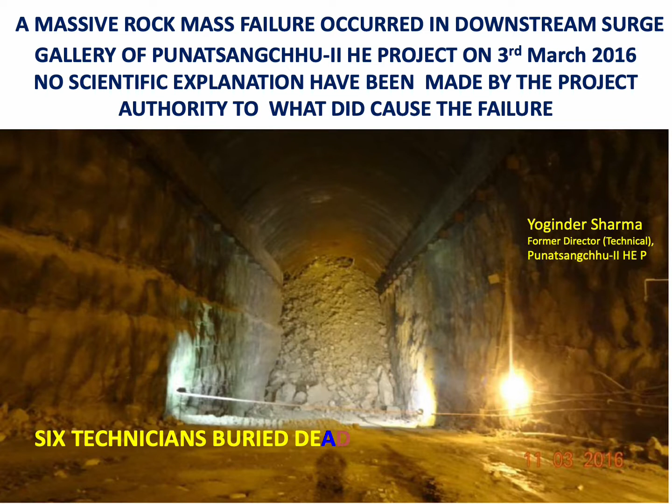A massive rock mass failure occurred in the downstream surge gallery of Punatsangchhu-II hydroelectric project on 3rd March 2016. There was no attempt made to bring out a scientific explanation by either the designers or the project authority or the consultants as to what did cause the failure.

6 technicians were buried dead under the falling muck. 3 of the bodies still lay buried, unrecovered.

I tried to study various aspects associated with the failure, and therefore the following is the presentation of my pursuit of truth, which many authorities have shied away from acknowledging and coming forth with the explanation.

I'll be talking about rock mechanics behind the raveling formation of the cavity, which was as big as a field of football, and as big in height as 1/3 of the height of the Eiffel Tower.

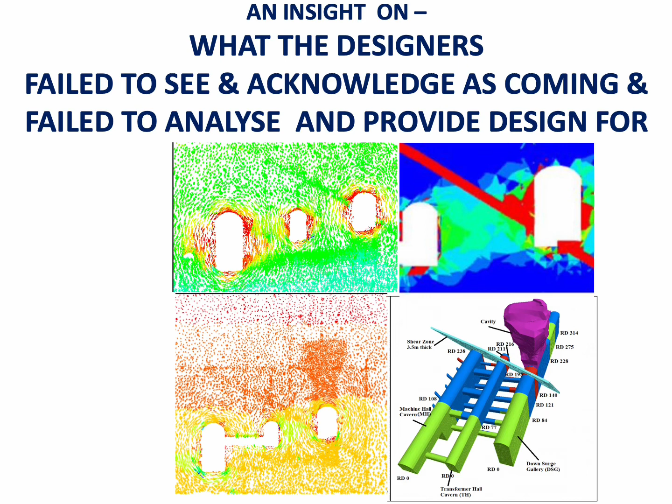To give an insight into what the designers failed to see and acknowledge as coming, and therefore failed to analyze and provide design for, which ultimately resulted in the raveling cavity formation of that big a size through the crown of the downstream surge gallery of Punatsangchhu-II project.

There are many geological features that were not investigated by the consultants, and no proper analysis therefore could have been, or was done, to foresee any situation which could have resulted in such a big failure.

I'll be talking in detail about all the aspects which led to the failure, and understand the rock mechanics behind that phenomenon.

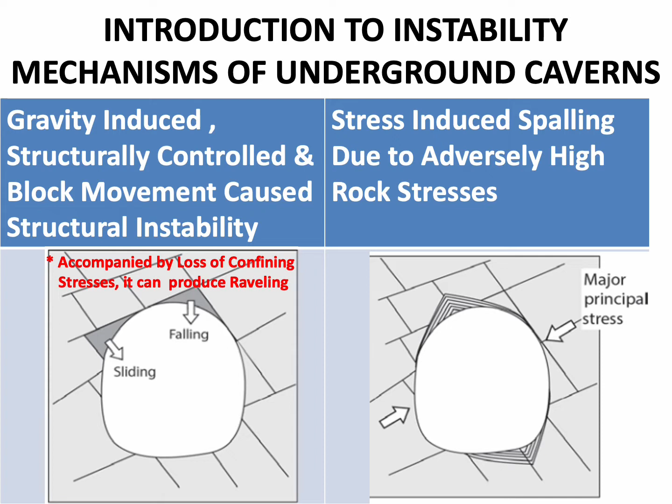Let's understand the mechanism of massive rock mass failure in the downstream surge gallery of Punatsangchhu-II hydroelectric project.

Punatsangchhu-II hydroelectric project is designed to produce 1020 megawatts, and is situated at the tail end of the Punatsangchhu-I hydroelectric project, which is also under construction. Punatsangchhu-II project starts where the TRT outfall of Punatsangchhu-I is located.

A dam is under construction on the Punatsangchhu river, which flows this way. There are 4 intake tunnels that lead to 4 desilting chambers, and to one headrace tunnel, which is around 13 kilometers long, which finally...

...was designed to fall into the river back when the surface powerhouse was designed as a powerhouse. For some environmental reasons, consultants shifted this location of the surface powerhouse to around 3 kilometers inside the hill.

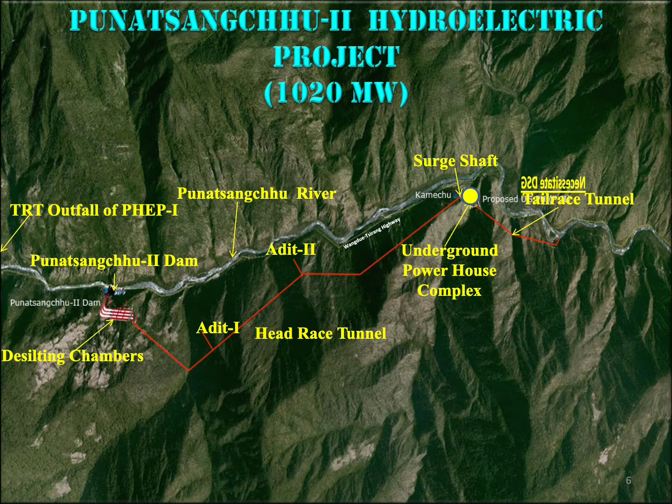With this change, there was a necessity of introducing a downstream surge gallery, because there was a 3.1 kilometer long tailrace tunnel introduced. The consultants for the project are WAPCOS, the design consultants are Central Water Commission, and the geology consultants are Geological Survey of India.

The massive rock mass failure happened 3 years after the excavation of the crown. In this slide we'll try to take note of 3 important points. First is that the massive rock mass failure had happened only after 3 years after the excavation of the crown.

The crown was standing for 3 years intact. Excavation had started somewhere around March 2013, until March 2016, the crown was fairly stable and was standing intact, when the rock mass failure happened 3 years after, in March 2016.

Second point to take note of is that the rockfall took place in a very short interval of time, leading to formation of a huge cavity above the crown.

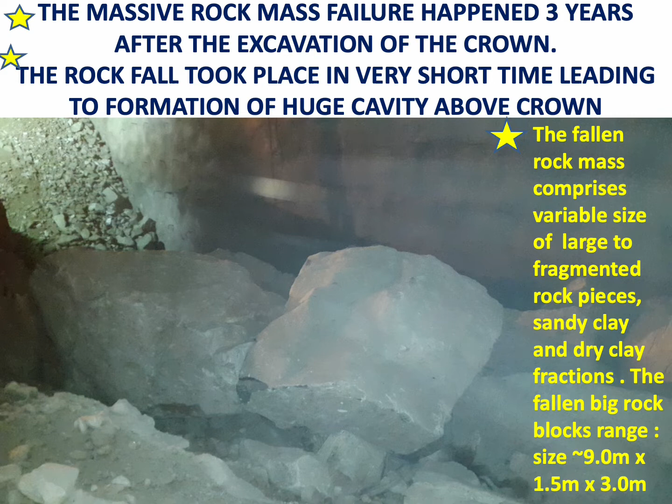Having started in March 2013, excavation in the 3 caverns - the machine hall, the transformer hall, and the downstream surge gallery - stood as on 2nd March 2016 at the stage shown in green. The machine hall, with its height of around 52 meters, was almost fully excavated. The bus ducts were fully excavated. The transformer hall was fully excavated. And the downstream surge gallery, out of its total height of 58.5 meters, had proceeded to a depth of 30 to 40 meters.

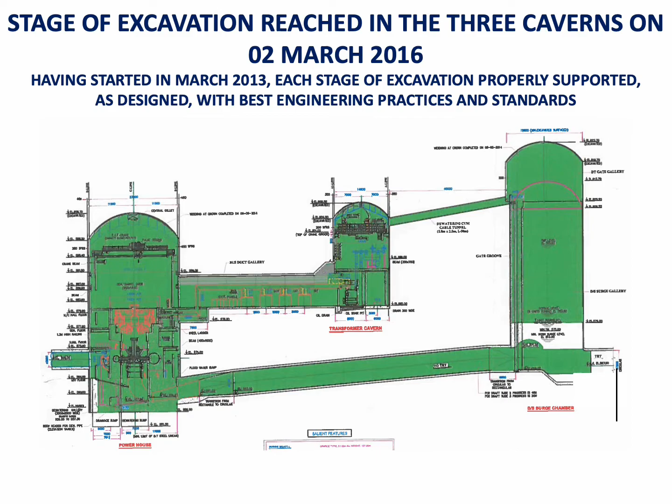The powerhouse downstream wall had 6 openings: 6 openings of the draft tube tunnels, 5 openings of huge bus ducts connecting tunnel, and an emergency exit. There were 4 pressure shafts - actually 6 pressure shafts - entering into the upstream wall of the powerhouse cavern.

So with these openings in the 2 walls, the walls of the machine hall were more vulnerable to instability. Moreover, the machine hall was excavated to its full height of 52 meters, whereas the downstream surge gallery was excavated only to a height of 30 to 40 meters. So considering which looked more vulnerable, the machine hall was not facing any instability of the order which the downstream surge gallery eventually had to meet with.

This is intriguing. It is also intriguing why the rock mass in the crown failed while excavation was underway in benching, 40 meters below the crown. Why did the rock mass fail suddenly and extend to make a 91 meter high cavity with a very large base, almost in no time?

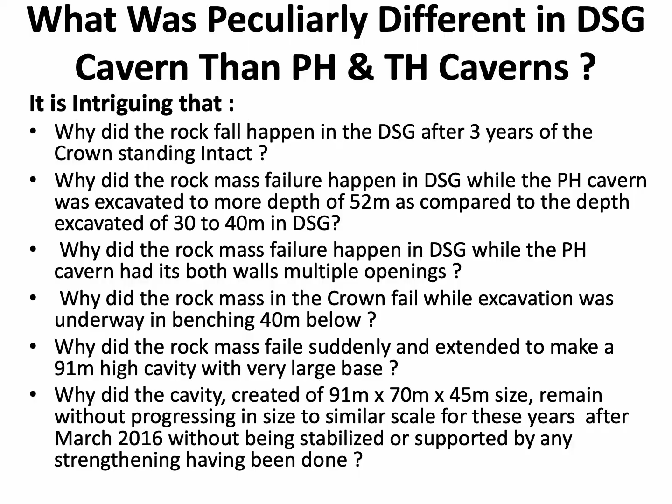We'll try to find answers to all these points in the coming slides. First, let us find whether the massive rock mass failure in the downstream surge gallery cavern was inevitable.

Actually, the designers were warned beforehand in 2014. The design consultants were furnished a numerical analysis performed by the contracting agency for construction of the powerhouse. That analysis established that upon adopting the given designs, massive yielding of rock mass would occur in the intermediate rock pillar when the downstream surge gallery was excavated to 2/3 height, around 38 meters, and this yielding would increase further with progress of excavation to its full height of 58 meters. But unfortunately, the design consultants did not pay heed to this analysis and snubbed it. Isn't it ironical that the excavated height of the downstream surge gallery was indeed at its middle third, around 30 to 40 meters, on 3rd March 2016 when the massive rock fall happened in the downstream surge cavern?

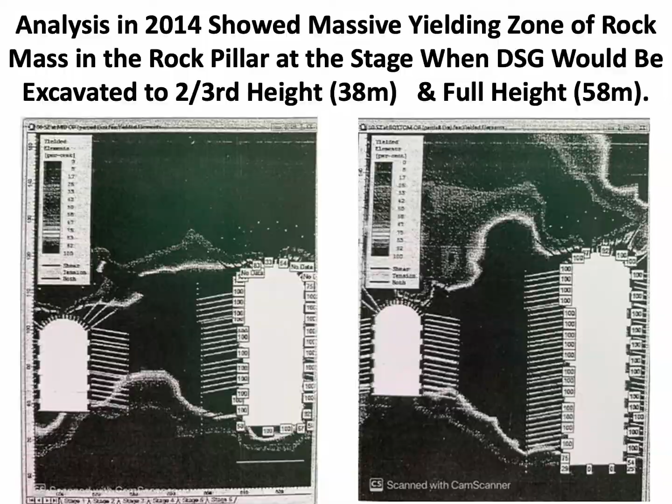Eventually, a cavity of 91 meter height, 70 meter length and 45 meter base formed, raveling through the downstream surge gallery's crown on 3rd March 2016. Let us understand what progressive raveling is, and when and why it happens.

There is an International Journal of Rock Mechanics and Mining Sciences which has a very beautiful paper, beautifully covering the topic of progressive raveling. The title of the topic is Stress, Instability and Design of Underground Excavations, by the authors C.D. Martina, P.K. Kaiserb, and R. Christiansson.

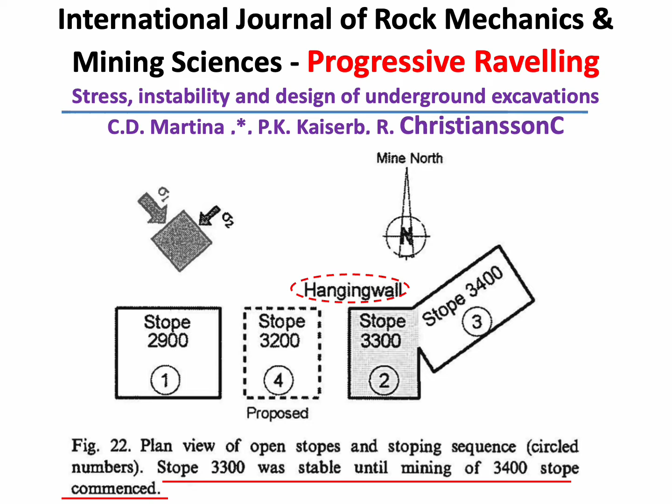So this is stope 3300 with this wall having a feature of hanging wall, and accordingly this wall is foot wall. The massive sulfide ore zone is at a depth of 300 meter along strike and 45 meter in width from foot wall to hanging wall, and dipped between 65 to 85 degrees. The dipping of this wall is around 65 to 85, quite a steep hanging wall.

This is stope 1, that in the sequence this stope was excavated first. So stope 3300 was excavated next, and when the stope 3400 had just started with its excavation, there was a raveling failure in the stope 3300 through its hanging wall.

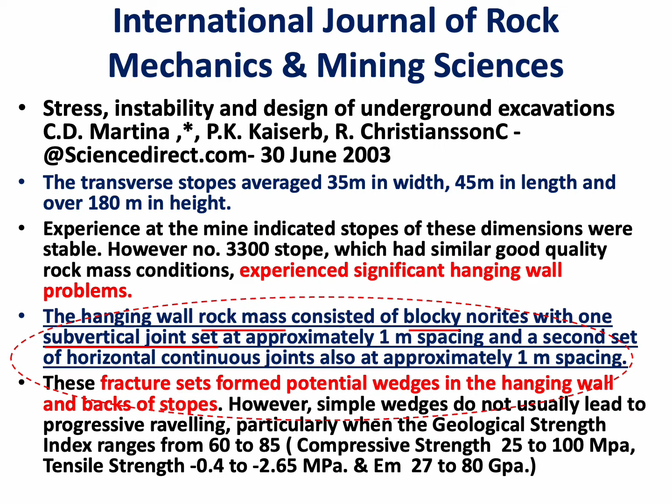These stresses becoming tensile become the cause of loss of confinement in this region. The blocky rock had lost its confinement in this region because of the prevailing tensile stresses in and around them.

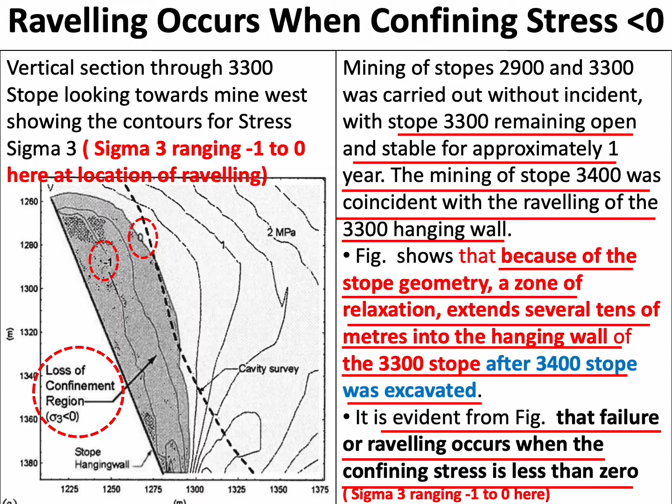It is pointed out in the paper that loss of ductile behavior happens due to lack of confinement pressure. More evidence is presented that the higher the confining pressure, the greater the ductility observed, and vice versa. So if the confining pressures are lesser or even tensile, then the ductility would be lost and the rock mass would depict brittle behavior.

The experiments on the effect of strain rate also show that when the strain rate is increased, it makes rock appear more brittle.

So these are the underlined principles for raveling: first, the ductility would be lost if the confining pressures do not remain higher.

If they become tensile, it will become brittle. And as and when the strain rate would increase, the rock would appear to be more brittle.

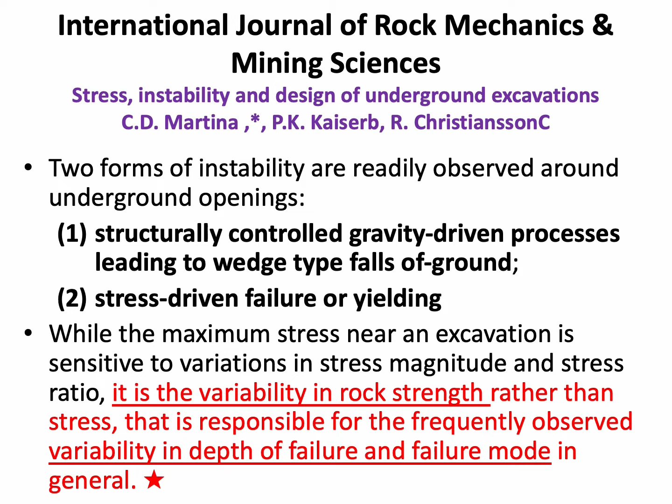If the rock mass is not uniformly or homogeneously representing its strength across various dimensions of it, that variability in rock strength rather than the stress is responsible for frequently observed variability in depth of failure and failure mode in general.

So now with this background, let us find answers to why did progressive raveling occur suddenly through the downstream surge gallery crown of Punatsangchhu-II hydroelectric project, and that too after 3 years of stable excavation of the crown. So from that paper that we have discussed before, we understand that there are 5 prerequisites for a progressive raveling to occur.

A progressive raveling occurs, extending the resulting cavity from the rock fall into several tens of meters into the rock mass, when the rock mass is blocky, comprising numerous joint sets. Like in the case of mining of stope number 3300, the rock mass is blocky, comprising numerous joint sets. These fracture sets form potential wedges. This is the second prerequisite, that the fracture sets should form potential wedges.

There exists a significant problematic hanging wall problem. So the third prerequisite is that if there's any hanging wall phenomenon happening, that hanging wall should have some problematic features. Then along with these, the fourth prerequisite is that the confining stress in the hanging wall is less than 0.

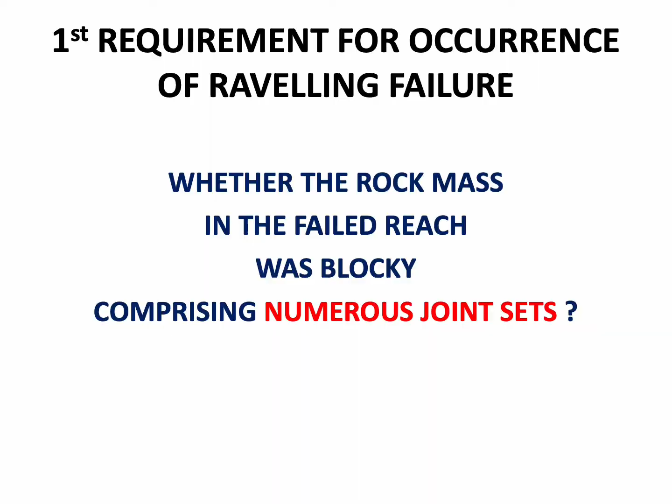The rock mass classification evaluated in excavation of central gullet in downstream surge gallery was that for RD 0 to 84 it was class 3, 84 to 121 class 4, and these are the average values of geological strength index associated with these reaches, which have been evaluated by National Institute of Rock Mechanics.

And from RD 121 to 140, it comprised class 5 rock mass with geological strength index of 32, and 140 to 228 RD, the rock mass is of class 4 with an index of 47 to 48. This is the reach in which eventually the failure had happened, comprising class 5 and class 4 with geological strength index of 32 to 47.

Besides a 3.5 meter thick major shear zone at RD 124 meter with an inclination of 45 to 60 degrees and orientation of north 30 degree east, there were also a number of other 0.02 to 0.3 meter thick shear seams that existed between RD 148 to 166 meter, with inclination of 10 degrees and orientation of south 60 degree west, and a geological strength index of merely 15, present in these reaches. So the actual geology was poor to very poor.

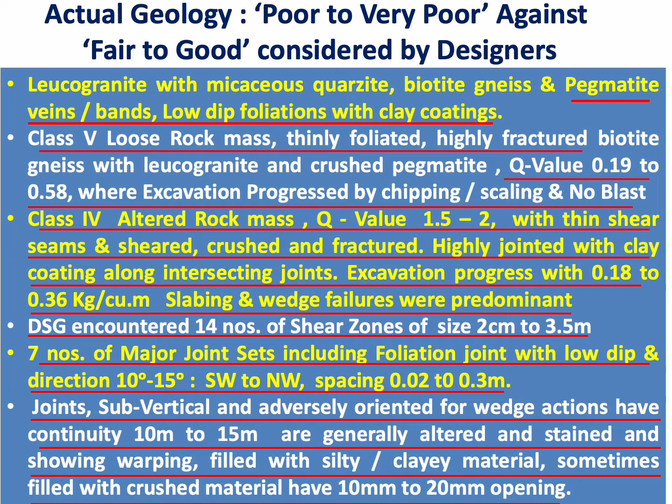Now there are 3 kinds of information available for joint sets present in the downstream surge cavern. The first set of information is as considered by the design consultants and thereafter by the National Institute of Rock Mechanics in their analysis. It represents 4 joint sets.

Whereas the fifth joint set, which is present as shown in the other two caverns, the machine hall or powerhouse cavern and transformer hall, is conspicuously missing in its representation in the downstream surge gallery. So these are the four joint sets that have been considered by the designers and also in the analysis by NIRM.

In contrast to this, in actual excavation, as mapped by the resident geologist of the construction agency, the information on joints encountered during excavation is J1, J3, J5, J4, J7, J8, J2, J6.

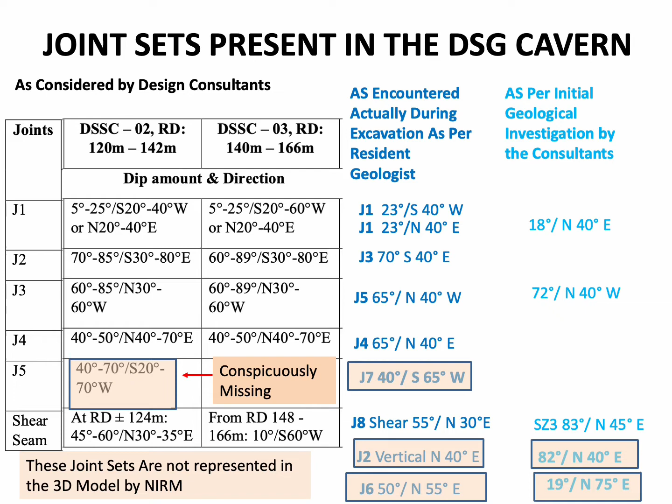The shear zone and the thinly foliated, highly fractured biotite gneiss and crushed leucogranite pegmatite got exposed on the left wall near SPL at RD 124 meter to RD 140 meter. Further, the crown blocky and jointed rock mass is exposed.

A major shear zone was encountered with 45 to 60 degree dip, N30 orientation, encountered in April 2013 at the crown portion between RD 124 to RD 140 meter, extending above the crown and below on either wall, dipping towards face, that is gable end wall. The excavation was progressing from south to north, and this shear zone was also dipping towards the face of the excavation.

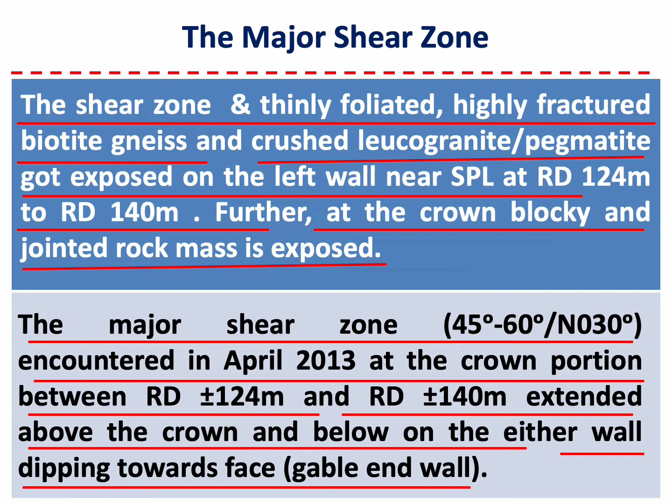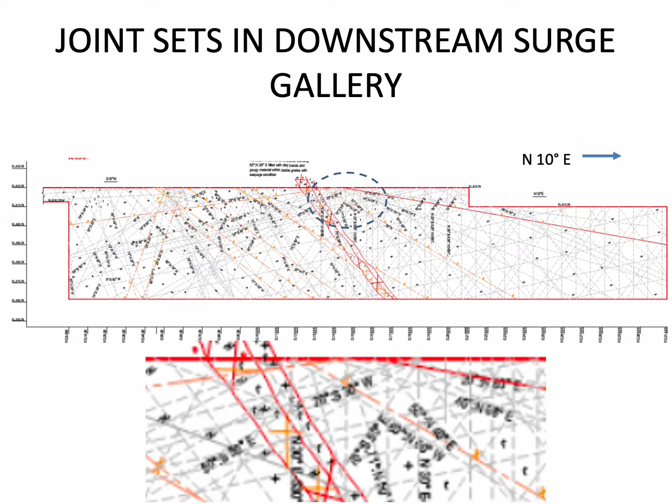This is another representation of the joint sets in the downstream surge gallery in 3D. This is the shear zone, with so many of the shear seams and subvertical and horizontal, subhorizontal joint sets.

So it is confirmed that the first prerequisite is met. Indeed, the rock mass in reach between RD 140 to 228 meter, which was lying on the steeply inclined shear zone, comprised class 4 altered rock mass with Q value of 1.5 to 2, which is highly jointed with clay coating and crushed and fractured rock infilled along intersecting joints, and had presence of numerous thin shear seams. So this confirms that the first prerequisite, which makes the rock mass highly jointed, was present there.

The second prerequirement for occurrence of raveling is whether the rock mass comprised numerous potential wedges. There is international literature which cautions that large numbers of adversely oriented joint sets would result in overbreaks and loose rock falls.

There is a paper, '40 Years with the Q System in Norway and Abroad,' by Nick Barton and Eystein Grimstad. It gives an interpretation from the parameters like joint set number and joint roughness number of NGI's rock mass quality index.

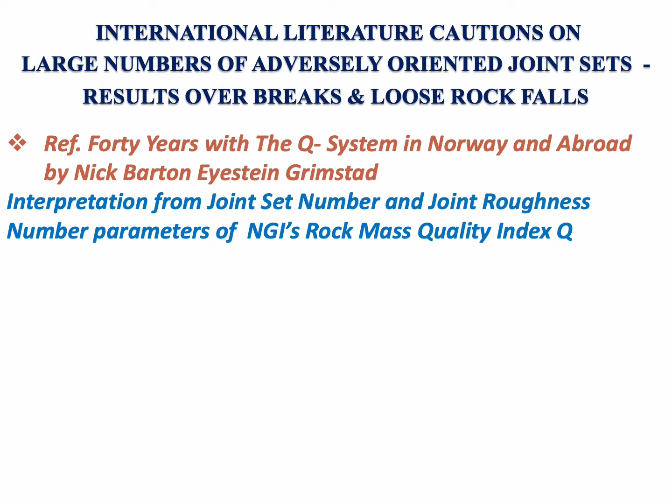The interpretation is that in underground excavations, if the ratio of Jn by Jr—that is, the ratio of joint set number and roughness number parameters—is greater than or equal to 6, then overbreaks are extremely likely to occur during excavations, despite contractors' best efforts with careful blasting. This is very important information: if the Jn by Jr ratio is greater than or equal to 6, then despite the contractor taking all best precautions and making all best efforts for excavation, there will still be overbreaks, and it is extremely likely to occur.

In Punatsangchhu-II project, the downstream surge cavern has a Jn by Jr ratio of 9 to 12, as against this threshold of 6. This ratio in Punatsangchhu-II downstream surge galleries of 9 to 12 explains the tendency of rock falls resulting from excavation despite use of controlled blasting, and even at locations where mere scooping was used for progressing in tunneling.

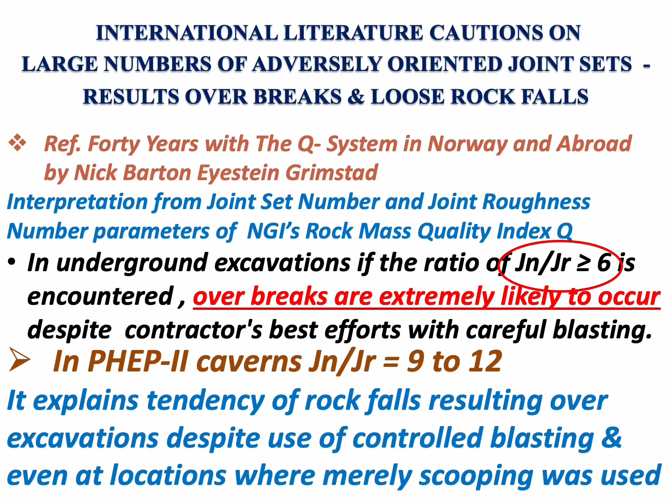So poor quality rock mass exhibited vulnerability to loose falls and face extensions. This is the background we must keep in mind: the poor quality rock mass in the downstream surge gallery exhibited vulnerability to loose falls and face extension because the Jn by Jr ratio was more than 6, and was of the order of 9 to 12.

The fragmented rock mass, having subvertical and adversely oriented joint sets along with subhorizontal foliation, is intruded with lenses and interbedding of altered and weak material like crushed pegmatite, which caused frequent loose rock falls and slabbing. In many instances, the rock face at the gable end of the excavation, despite being adequately supported by ribs, used to get extended by loose falls from the crown and walls in the heading portion itself.

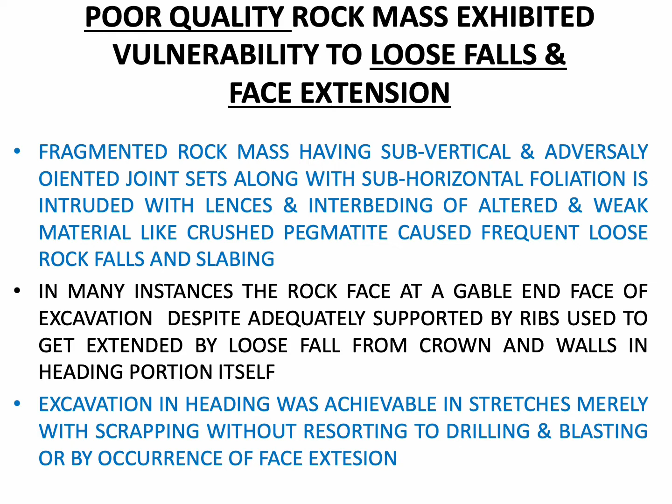This stereonet shows the potential wedges in the actual geology, with 8 numbers of joint sets: J1, which is foliation and very flat; J2, which is subvertical; J3, quite steep; J4, quite steep; J5, also quite steep; J6, also quite steep; J7, also quite steep; and J8 itself is a shear zone, quite steep, shown with crosses.

With presence of all these 8 joint sets, these are the potential wedges formed by intersection of J3 and J7, intersection of J2 and J3, intersection of J3 and J4, and intersection of shear zone J8 and J3 joint sets. All these potential wedges are coming within the circle of friction angle. This dotted line is the friction angle location of the stereonet, and all these potential wedges fall within that circle, so these are the potential wedges having potential of failure.

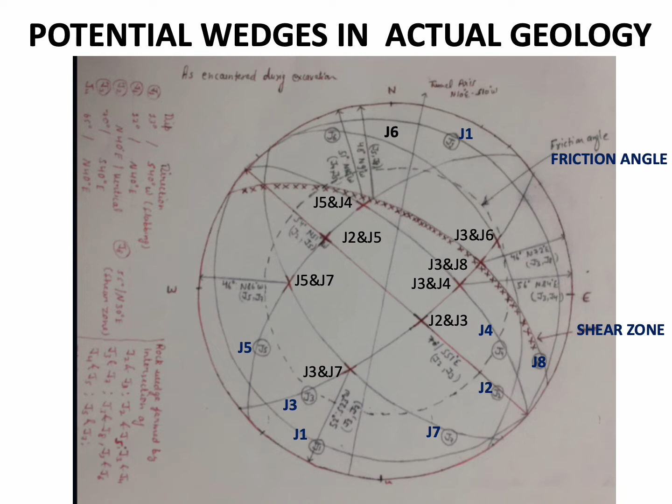This confirms the second check also, that indeed the rock mass in the reach between RD 140 to 228 meter, which has flat foliations and is highly jointed and lying on that steeply inclined shear zone, comprised 8 sets of potential wedges with clay coating along intersecting joints and with presence of numerous sheared, crushed and fractured thin shear seams, having orientations steep enough to lie within the friction angle. Therefore, the slabbing and wedge failures were predominant. So the second check is also confirmed.

The third requirement for occurrence of raveling failure was whether the blocky and fractured rock mass which had failed did encounter a problematic hanging wall syndrome. Let us find out.

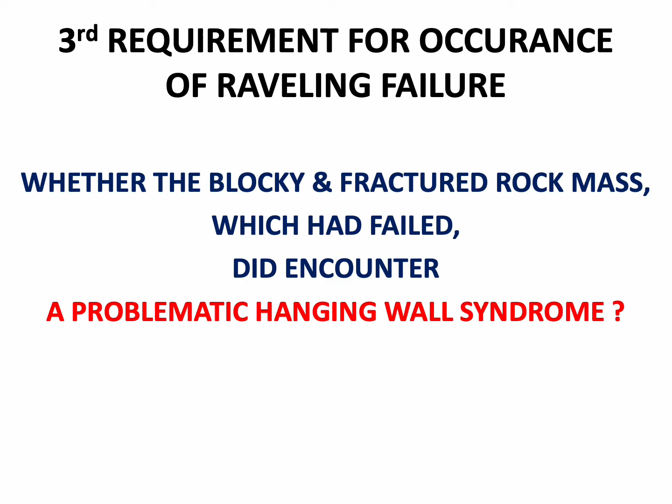There was a 3.5 meter thick major shear zone at RD 124 meter with an inclination of 45 to 60 degrees and an orientation of N 30 degree east, which resulted in formation of the hanging wall. This shear zone was initially met when the two construction tunnels, that is the main access tunnel to powerhouse and the construction adit to downstream surge gallery, were in their starting reaches.

It was apprehended. The shear zone was met in construction adits in 2012. At that time it was apprehended by the resident geologist that this shear zone may extend and cut across the caverns also, and eventually the same shear zone was encountered, cutting across the full depth of the downstream surge gallery, meeting the transformer hall at its gable end and merely touching the powerhouse machine hall cavern.

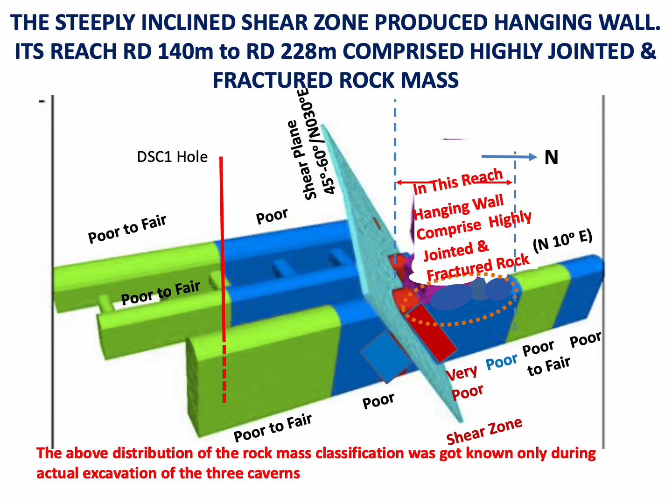This hanging wall had multiple inclined discontinuities and was highly jointed and fractured, as we had seen earlier. This is the shear zone, steeply dipping, and this hanging wall has multiple inclined discontinuities from these joint sets. It is highly jointed and fractured rock mass which is prone to sliding in an unconfined state, because the orientation of the joint sets is such that the formed potential wedges all lie within the friction angle, as we had seen in the stereonet. So they are all prone to slide if they meet a further unconfined state.

So the third confirmation check also is proved true, that indeed the rock mass in the reach between RD 140 to 228 meter was lying on the steeply inclined shear zone. It formed a hanging wall with the following problems: flat foliations, highly jointed, multiple inclined discontinuities. It comprises 8 sets of potential wedges with clay coating along the intersecting joints, with presence of numerous sheared, crushed and fractured thin shear seams. Slabbing and wedge failures were predominant because of their orientation becoming less than the friction angle.

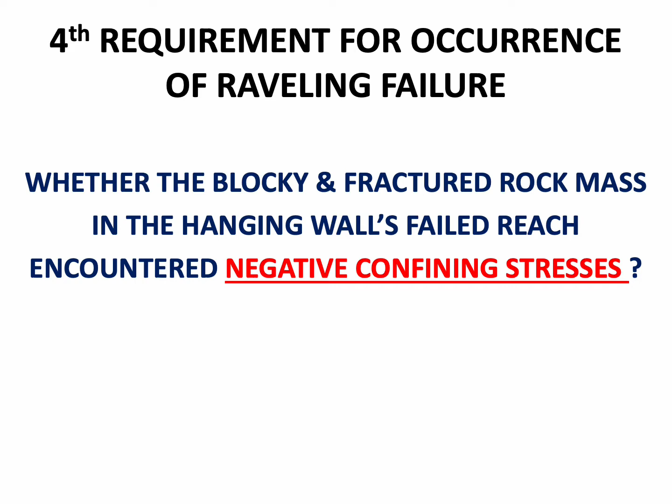For that, we start with the in situ stresses before excavation. The principal stresses were in the range of 4.14 to 5 MPa. Maximum horizontal principal stress was 4 MPa. The vertical stresses were in the range of 4 to 5, and the major principal stress was of the range of 4 MPa. Minimum was in the range of 2 to 3 MPa.

Maximum horizontal principal stress had a direction of N17 degree, whereas the longitudinal axis of the downstream surge gallery was accordingly fixed to have an orientation in the direction of N10 degree east. So according to the direction of maximum horizontal principal stress of N17 degree east, the designers did fix the longitudinal axis of the downstream surge gallery quite parallel to that, in N10 degree east.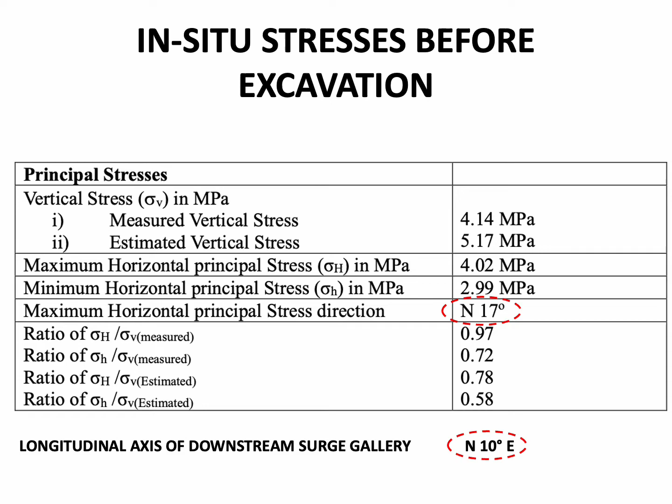There was higher stresses and poor strength of rock mass, with variability of strength. The rock mass assemblage had joints filled with highly fractured and crushed material. So this rock mass in the problematic reach had higher stresses and poor strength of rock mass, and this poor strength presented the variability of strength.

The uniaxial compressive strength of the intact rock in the reach was of the order of 55 MPa, and that of the 3.5 meter thick shear zone was 3 MPa. This is the uniaxial compressive strength of intact rock, not the rock mass. The uniaxial compressive strength of rock mass in comparison to the rock in the reach is only of the order of 1.08 to 2.84 MPa, and the rock mass strength of the shear zone was only 0.05 MPa.

So see the comparison, the variability of strength between intact rock and the rock mass which comprises it. The intact rock exhibits strength of 55 MPa, whereas the rock mass, which comprises of intact rock and fractured and shear zones, shear seams and clay filled joints, exhibits only a compressive strength of the order of 1.08 MPa, so 55 down to 1.08 MPa. This is the variability of the strength range. Also, the 3.5 meter thick shear zone exhibits a uniaxial compressive strength of only 0.15 MPa. So there is a huge variability of compressive strength in the rock mass as compared to its intact rock constituents.

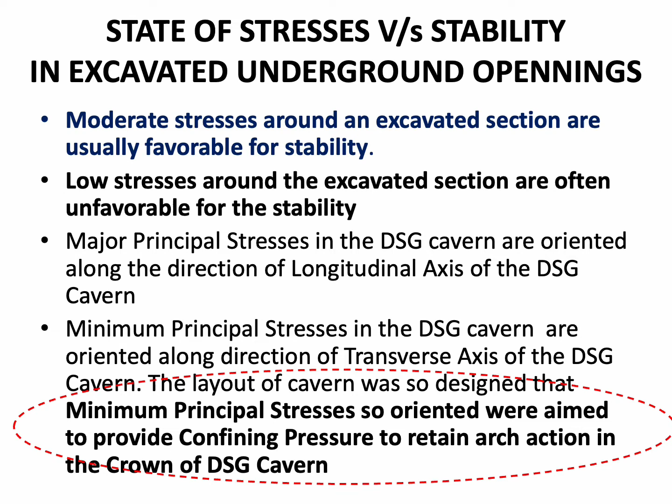The layout of the cavern is so designed that the minimum principal stresses should provide the confining pressure for stability of the arch.

Now let us see whether this confining pressure was there or not.

A 3D analysis of the Punatsangchhu-II powerhouse complex was performed by the premier organization, National Institute of Rock Mechanics of India, but it was performed 2 years after the rockfall at the request of the consultants, and it incorporated the joint sets as inferred by the consultants initially at the construction stage.

So please bear in mind that this analysis done by NIRM has representation of joint sets as conceived by the consultants at the initial stage of construction, and are not based on the actual joint sets, which were more in number and more in severity than what was conceived by the consultants in the initial stages of construction.

There are three sources of information on joint sets that we had earlier discussed: inferred at the tender stage of drawings, inferred by the consultants initially at the construction stage which is adopted by NIRM in its design, and as inferred by the resident geologist of the construction agency during actual excavation of the downstream surge gallery. This joint sets we saw in the stereo nets were actually present, whereas that inferred by 4 joint sets inferred by the consultants and designers have been adopted by NIRM in their analysis.

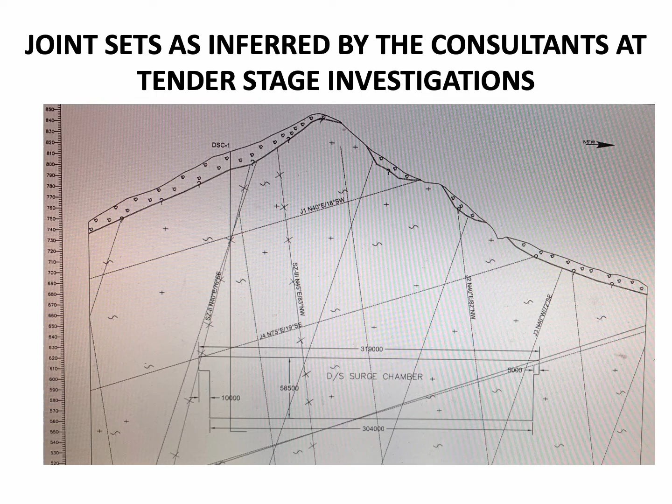However, 2 joint sets which were there in the tender stage were not later on considered by the designers; they didn't find place in the joint sets mentioned by the designers.

However, the resident geologist of the construction agency states that there are these 8 joint sets. So NIRM's analysis takes care of these 4 joint sets plus the shear zone and the shear seams, whereas in actuality there were 1, 2, 3 more joint sets which are left out in the representation in the analysis. J7 is not there, J2 is not there, which is vertical, J6 is not there in the analysis.

So as discussed earlier, these are the joint sets which are actually present in the downstream surge gallery: J1 foliation, J2 subvertical, J3, J4, J5, J6 and J7. Along with this, the shear zone, major shear zone J8.

And this gives rise to all these 8 potential wedges: J5 and J4 intersection, J2 and J5, J5 and J7, J3 and J7, J2 and J3, J3 and J4, J3 and J8, J3 and J6 intersections.

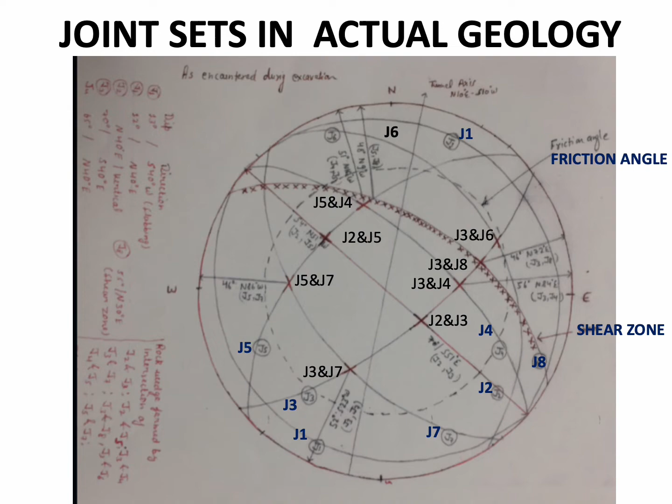The 3D analysis of Punatsangchhu-II powerhouse complex by NIRM, done 2 years after the rockfall, is based on conservative representation of joint sets. As we have seen, the 3D discontinuum model analysis of the powerhouse complex was carried out upon request in 2018 by the National Institute of Rock Mechanics, incorporating various parameters like rock properties, rock mass joints, rock support and rock reinforcement, and the sectional profiles as considered by the designer consultants in their designs, which was based only on the geological investigation report of the consultants.

However, as per geological interpretation made by the resident geologist of the contracting agency for construction of the powerhouse complex, there were other additional distinct prominent joint sets present, as we have seen in the stereo net. These other joint sets comprise one set dipping vertical in north 40° east direction, another dipping 50° north 55° east, and the other set dipping 40° southwest with 65° orientation. These don't find their place in the representation in the 3D numerical model.

The representation of actual joint sets, including these additional joint sets, would have definitely made the 3D numerical analysis result in finding the scenario of excavation of DSG more critical and much more unsafe. We'll see that even with the lesser representation of joint sets, the conditions in the excavated caverns are not stable, and if all the actual joint sets had been represented in the analysis, the DSG would have been found to be more critical and much more unsafe.

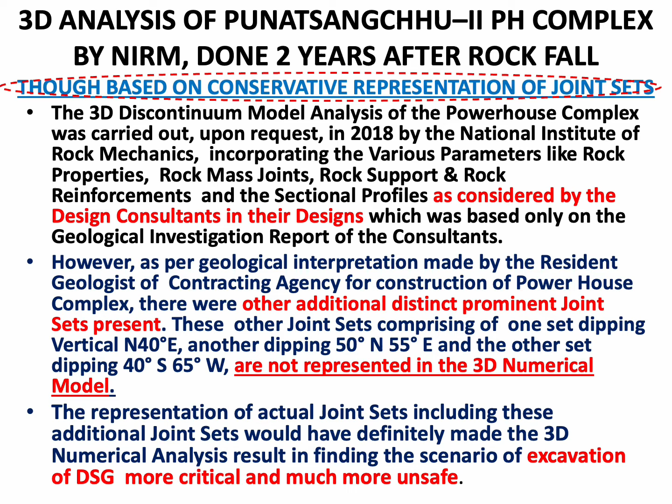So let us explore stress conditions present even through this analysis, which has representation of less critical joint sets. The results of the 3D model by NIRM discussed here further are based on the joint sets as considered by the designers and are deficient in presenting all of the actual joint sets which exist in the DSG as interpreted by the resident geologist. If all the joint sets actually present are included, the results of the analysis may be more critical than the present study.

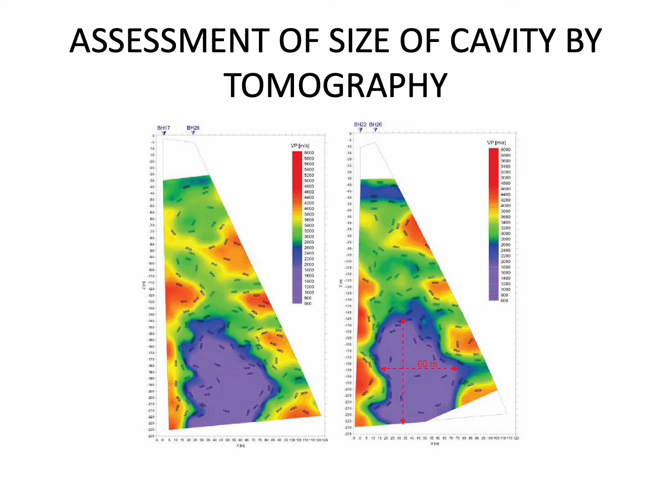The assessment of the cavity, which is unreachable, was done through two studies. One is cross-hole tomography, which gave a shape of the cavity. The second exercise for assessing the cavity size was done by LIDAR technology using the CMS 500 camera.

The shape of the cavity and the shape of the stress concentration above the crown are ironically quite similar.

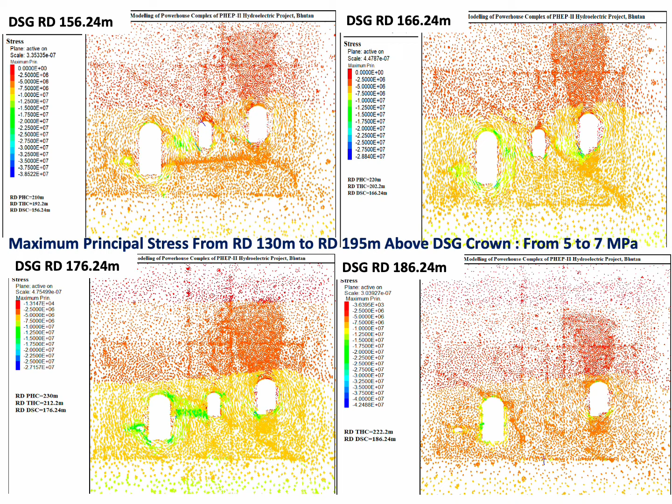At different reaches, 156, 166, 176, 186 and beyond, similar conditions of stress concentration are seen up to 100 meters of height above the crown, with major principal stresses of 5 to 7 MPa, much more than the UCS of the rock mass itself, which is 2 MPa.

So near the crown, stresses were in the range of 5 to 8 MPa at the middle of the crown. This 5 to 8 MPa range, shown in green and yellow colors, is present in the near vicinity of the crown, at the middle of the crown at RD 196.

That means that the stress conditions starting from the RD near the shear zone, which was around 140 meter RD, until RD 196, were continuing to be quite stressful.

Longitudinal and major principal stresses are far greater than the UCS of the poor rock mass in the crown, extending up to several meters and even up to 100 meters of height. The maximum principal stresses in the crown of the excavated DSG cavern are parallel to the longitudinal axis of the cavern, and between RD 130 to 195 are of the order of 5 to 7 MPa, which is higher than the UCS of 1 to 2.84 MPa of the rock mass.

This stress condition led the crushed material and clay filling in the highly jointed rock mass blocks to yield and disintegrate into destabilized, independent rock pieces.

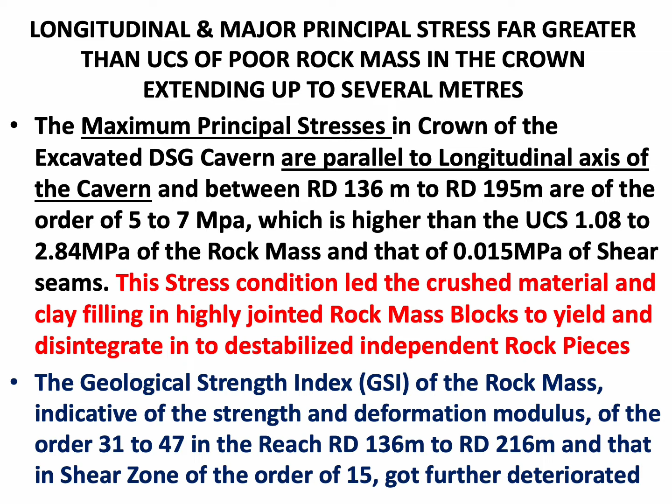The geological strength index of the rock mass, indicative of its strength and deformation modulus, was of the order of 31 to 47 in the reach 136 to 216 meters, and in the shear zone of the order of 15, must have got further deteriorated. These are the original GSI values considered, but with the stress conditions we are seeing, of 5 to 7 MPa, much more than the UCS of the rock mass, definitely the geological strength index would have come down further.

The geological strength index falls in this reach, which represents blocky, disturbed rock mass, to disintegrated and poorly interlocked, heavily jointed, broken rock mass. It falls in this reach.

Let us explore the state of minimum principal stresses. The minimum principal stresses, aligned in the transverse direction to the axis of the cavern, should act to confine the rock mass and be effective in producing arch action in the crown. Moderate stresses are usually favorable for stability, as we had seen in the case of the downstream surge gallery also.

Its orientation is such that the minimum principal stress acts transverse to the longitudinal axis. So in the transverse axis, the minimum principal stresses act, and are supposed to be responsible for creating confining pressures for the various rock block constituents of an arch, making it capable of forming arch action. Moderate stresses in the transverse direction are usually favorable for the stability of the arch.

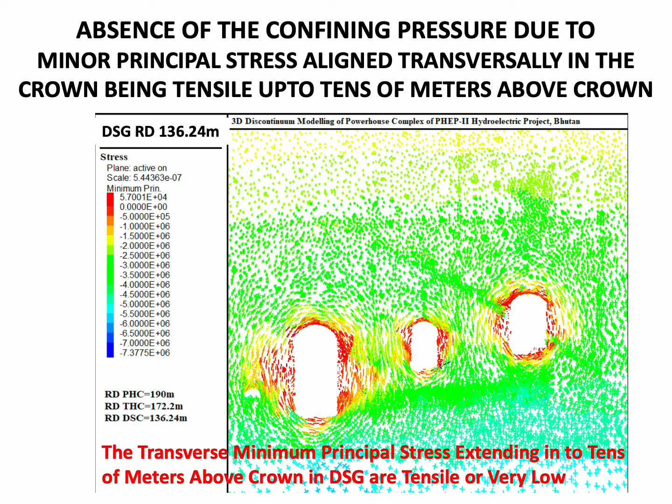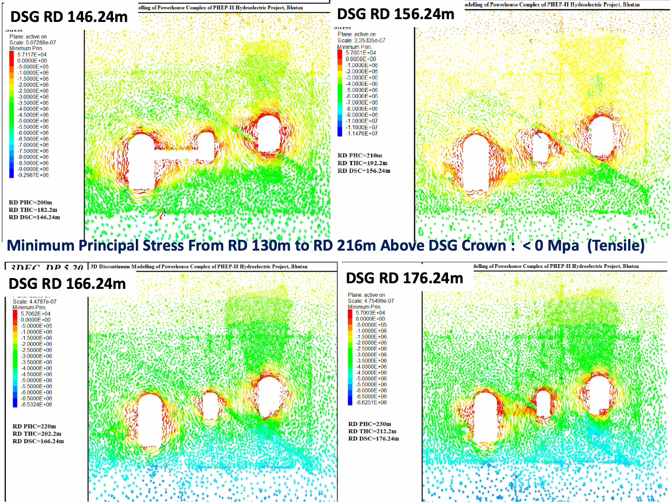This also shows that over the reach from 146, 156, 166, 176, all across, the stress conditions or minimum principal stresses were similar, all tensile, extending into tens of meters above the crown. Also further at 186, 196, 206, 216, everywhere, confining stresses were missing and had become tensile.

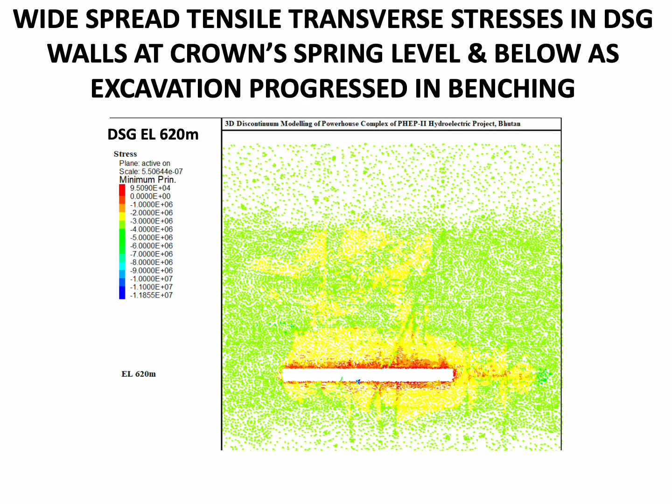In the plan we see all along the length of the downstream surge gallery, the transverse direction minimum principal stresses are tensile. So the hanging wall in the reach 140 meter RD to 228 meter RD, which was highly jointed and fractured rock mass, was having no confining pressure present.

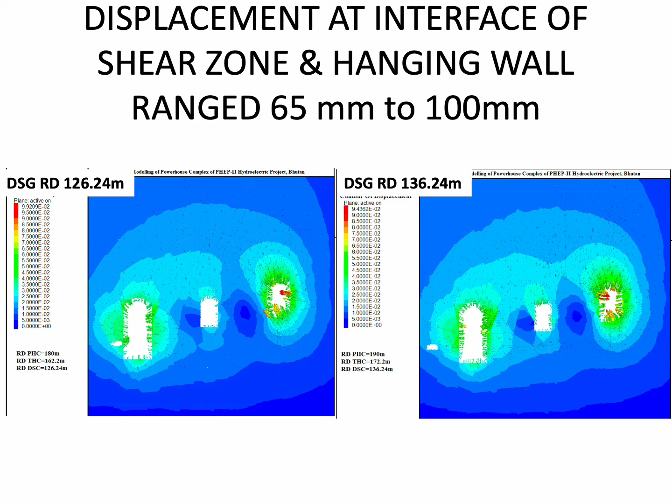So in this reach there were no confining pressure available to form the arch action in the crown. Displacements at the interface of the shear zone and hanging wall were ranging from 65 mm to 100 mm. Here in the downstream surge gallery, we see the displacements are of the order of 65 to 100 mm. We'll see it in the next slide.

So in the downstream wall, if we see at the SPL level, these are the displacements of the order of 10 centimeter, and in the upstream wall and the crown, the displacements are again of the order of 10 centimeter at RD 126 to 136 meter. That means immediately after the shear zone, the rock mass lying at the SPL had undergone displacements of the order of 10 centimeters.

So this confirms the fourth prerequisite check also, that indeed the rock mass in the reach between RD 140 to 228 meter formed a hanging wall which had flat foliations and which is highly jointed and which is lying on the steeply inclined shear zone, comprises 8 sets of potential wedges with clay coating along intersecting joints, presence of numerous sheared, crushed and fractured thin shear seams.

Further, that the confining stresses in the hanging wall above the crown and in the walls were indeed absent and in fact were tensile, which caused the rock blocks disintegrate into loosened individual rock pieces without any interlocking at their joints, while the joints contained only the already yielded clay and crushed material in them.

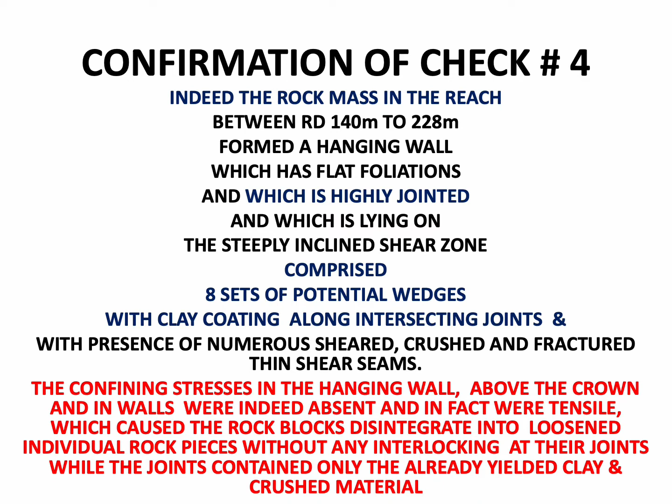Now the fifth requirement of the occurrence of the raveling failure was whether the discontinuities in the rock mass in the hanging wall have inclined geometry that can guide the gravity-induced and structurally controlled fall of the loosened blocks of fractured rock mass in the hanging wall.

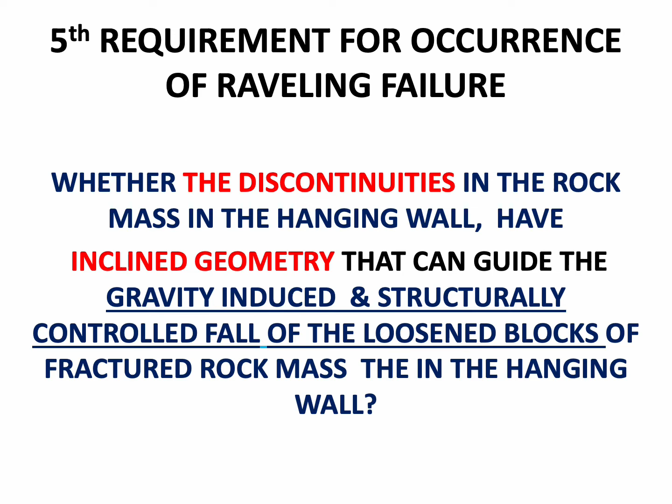The inclined structural discontinuities present in the downstream surge gallery. The major shear zone is 45 degree to 60 degree inclined with north 30 degree orientation, which intersects the crown portion between RD 121 to 140 meters, extending above the crown and below on either walls, dipping towards face. This produces hanging wall effect in the northern side of the shear zone.

The hanging wall side in downstream surge gallery comprise of blocky rock mass resulting from presence of fracture sets formed by multiple shear seams and subvertical joints and adversely oriented joints filled with clay and fractured rock mass, producing 8 sets of wedges.

So, talking of the inclined discontinuities, hanging wall rock mass is jointed, fractured with inclined discontinuities forming multiple wedges with high potential of fallout that we have already discussed in the stereo net as well as on this. So there are multiple inclined discontinuities which make the highly jointed and fractured rock mass in the unconfined state prone to slide under gravity. So from the prerequisites that were required, we saw that the multiple inclined discontinuities are making the highly jointed and fractured rock mass in the unconfined state becoming prone to slide under gravity.

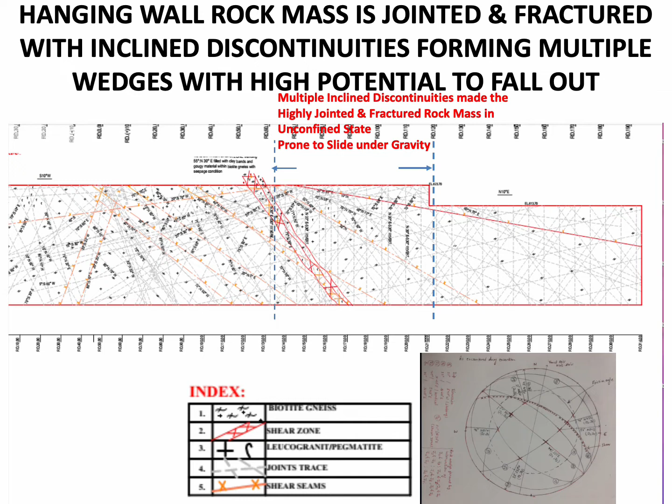In this reach, the confinement has been lost, discontinuities are inclined, there are potential wedges, fracture sets, which are making all these blocks prone to slide under gravity. Same thing shown here, that in this hanging wall, in this reach, the confining stresses have become zero in the jointed and fractured rock mass.

With the presence of inclined discontinuities and fracture sets, the potential wedges are prone to slide in this reach where the confinement has become zero, or even there are tensile stresses in the transverse direction which should be responsible for creating an arch action.

The geometry of the inclined discontinuities guide the gravity-induced and structurally controlled fall of the blocks of the rock in the hanging wall. So this prerequisite is also met, that the geometry of the inclined discontinuities are guiding the gravity-induced and structurally controlled fall of the blocks. So the fifth prerequisite also confirmed.

Indeed, the rock mass in the reach in the hanging wall between RD 140 to 228 meter had no confining and in fact tensile stresses present in the crown and in the walls, which caused the rock blocks loosened at the clay and crushed material filled joints.

The rock mass, which has flat foliations, numerous sheared, crushed and fractured thin shear seams, is intersected by multiple steep joints with adverse inclined geometry, forming 8 sets of potential wedges which are lying on the steeply inclined shear zone in a loosened state with no interlocking, are thus prone to gravity-induced and structurally controlled fall of the blocks.

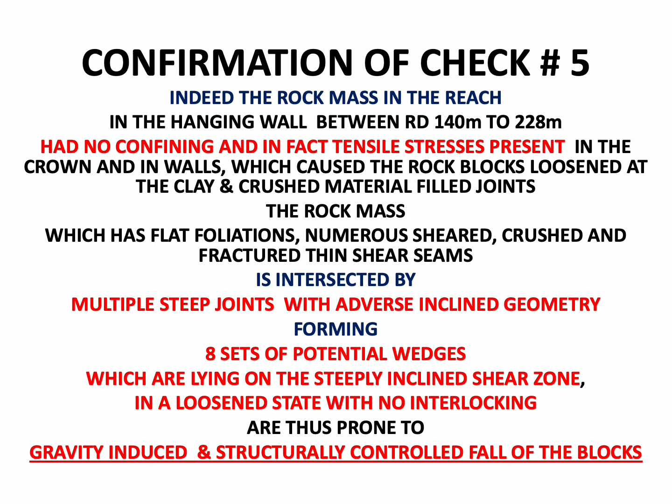So absence of confining pressure in the reach of the crown in the DSG was there in the long reach. The tensile strength of rock mass in the reach 136 to 216 meters is of the order of 0.02 to 0.057.

The minimum principal stresses between RD 136 to 216 along the transverse axis in this reach are less than 0 and are tensile, of the order of 0.06 MPa, which is greater than the tensile strength of 0.02 MPa, ranging from 0.02 to 0.057.

The tensile stresses being 0.06 MPa are greater than the tensile strength of the rock mass, which is causing widespread tensile failure in the rock mass in the crown and walls in the downstream surge gallery.

The unconfined and loosely packed blocks of rock mass got destabilized and toppled by longitudinal principal stresses which exceeded the UCS of rock mass. These loosened rock mass failed to provide arch action in the crown of the downstream surge gallery. The loose rock blocks fell down under gravitational force. The geometry of the discontinuities extended the zone of relaxation raveling to around 90 meters above the crown.

The rock blocks are so precariously held that a fresh rock fall had happened as soon as the debris from the earlier rock fall was tried to be removed. There were 6 bodies entrapped here. 3 bodies were tried to be removed by clearing a little debris from here, but as soon as that debris was removed, a fresh rock fall was triggered.

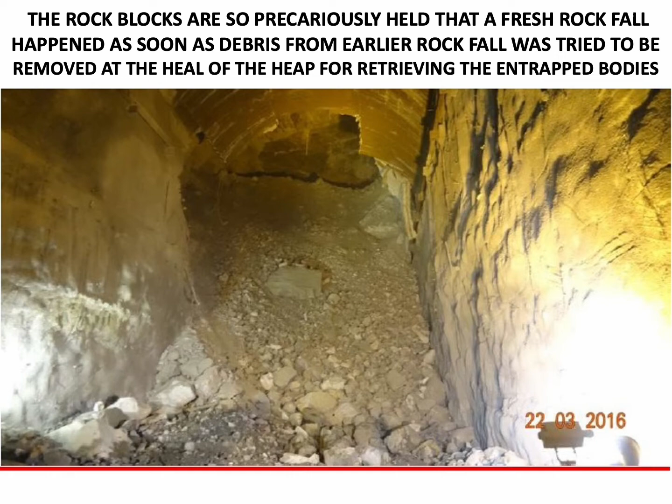Within the days of the earlier fall, the fallen rock mass comprised variable sizes of fragmented rock pieces, sandy clay and dry clay fractions, with rock blocks of maximum size 9 meters by 1.5 by 3 meters.

The rock fall involved loose falls under gravitational forces of even larger rock blocks, which were loosely held together due to absence of confining pressure in the transverse direction, while the material infilling their joints, comprising clay and sheared content, yielded from the excessive major principal stresses. The very often present yielded intrusive pegmatite veins and bands also weakened the rock mass.

Hoek and Brown state in their book that heavily jointed rock mass behaves like an assemblage of interlocked angular particles with no significant strength under unconfined conditions. So these heavily jointed blocks in yielded rock mass suffered brittle failure and resulted in raveling of rock blocks one after the other because they were unconfined. Regular and planar joint surfaces of blocks are seen from the fallen rock blocks.

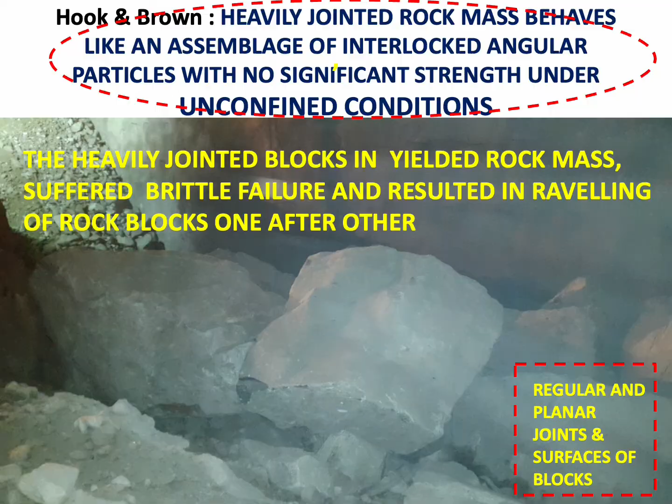So what is the explanation of rock mass failure in the downstream surge gallery given by the Norwegian Geotechnical Institute? Let us go through that. Findings of the Norwegian Geotechnical Institute say that it is believed the steel ribs do not and will not provide any acceptable rock support. All the ribs failed at joints and the steel ribs do not show any sign of bearing the load from the rock mass. NGI has mentioned in its findings that the ribs do not show any sign of deformation, and the rock pillars are more loaded. These are the two points mentioned in the NGI findings.

So, what is the explanation of rock mass failure in the downstream surge gallery given by NGI? Their findings state it is believed the steel ribs do not and will not provide any acceptable rock support. All the ribs failed at joints and do not show any sign of bearing the load from the rock mass, because they had not taken any excessive load and will not provide excessive support. Therefore, the ribs do not show any sign of deformation, whereas the rock pillars are seen to be loaded more. This is what NGI finds.

Now, the observation is that the ribs failed at the joints and the steel ribs do not show any sign of bearing the load from the rock mass. This implies that the ribs have not failed as a structural element. The ribs had fallen down along with the debris, but since they did not show any sign of bearing the load, they are not disfigured, which implies they have not failed structurally. The following observations of NGI corroborate that the ribs had fallen due to withdrawal of their bearing support.

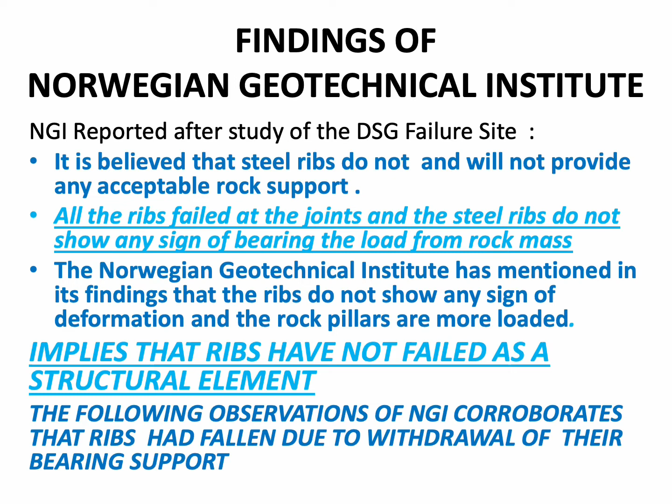The proof that the massive rockfall happened suddenly and in short duration lies in this: the steel ribs which are lying fallen down are found untwisted and have their arch shape intact. These bear no sign of taking load. The bolts at the joints of the rib segments are intact. The various rib segments are found separated at connecting joints with the joint plate welds broken. These all indicate happening of an impact loading.

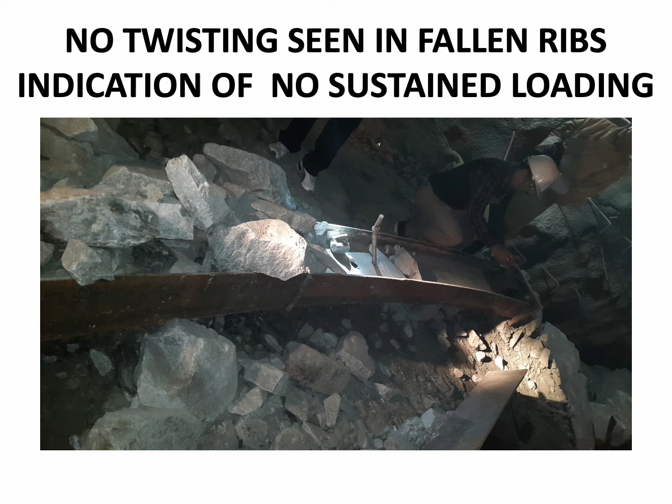We'll see in the next picture that these steel ribs are untwisted. This is a steel rib. They have their arch shape perfectly maintained. No twisting, no sign of bearing excessive load. Their bolts are also intact.

At their connecting plate joints, the various segments have been torn apart from the connecting plates. This shows a sudden brittle failure. Ribs do not show sign of buckling as an elastic failure from excessive loading, but are sheared at joint plate, indicating sudden brittle failure of the weld. So the weld between the rib and the connecting plate had failed because of the sudden brittle failure, and there was no sign of yielding under any load which would have shown any twisting or yielding of the ribs.

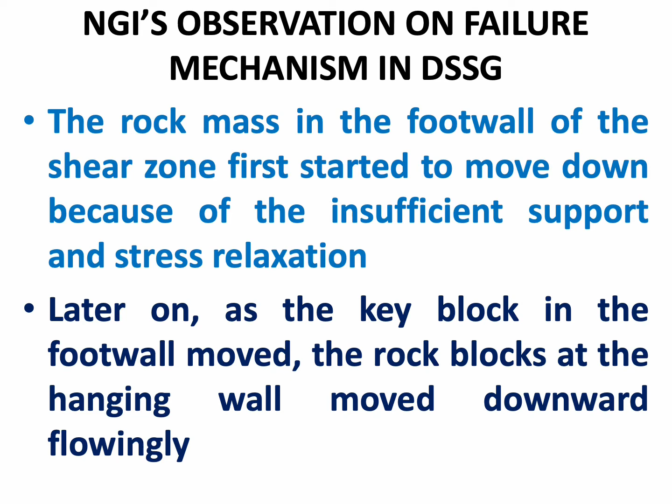NGI's observation of failure mechanism is that rock mass in the footwall of the shear zone first started to move down because of insufficient support and stress relaxation. Later on, as the key block in the footwall moved, the rock blocks at the hanging wall moved downward flowingly. This is what NGI concludes. NGI's observation too corroborates structural failure of the rock mass.

NGI has reported that the shape of the cavity is controlled by the discontinuities. It is clear that the major mechanism of the rockfall was structurally controlled blockfall. This is NGI's finding.

The orientation of the maximum horizontal stress is parallel with the axis of the downstream surge gallery, which does not help to prevent the rockfall through confining on the rock blocks at the roof. So NGI also concludes that because of the absence of confining stresses, the rockfall in the roof had happened.

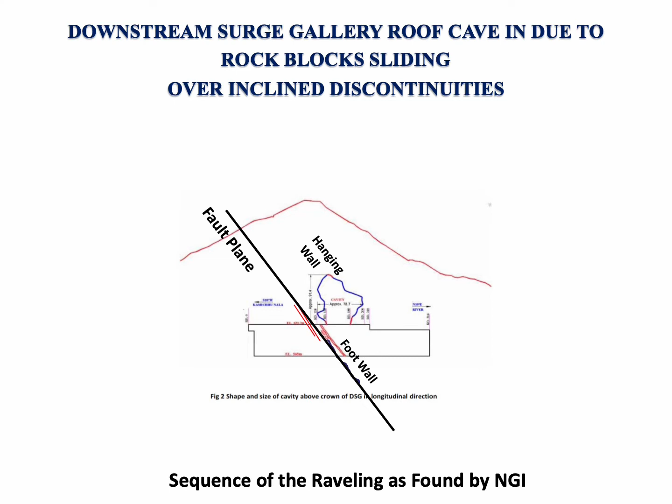The rock mass in the footwall of the shear zone first started to move down because of insufficient support and stress relaxation. This portion of the wall which is lying on the shear zone had its movement, and the rock mass in the footwall of the shear zone started to move down. This portion started moving down.

Later on, as the key block in the footwall moved, the rock blocks at the hanging wall moved downward flowingly. Then all this started moving down flowingly.

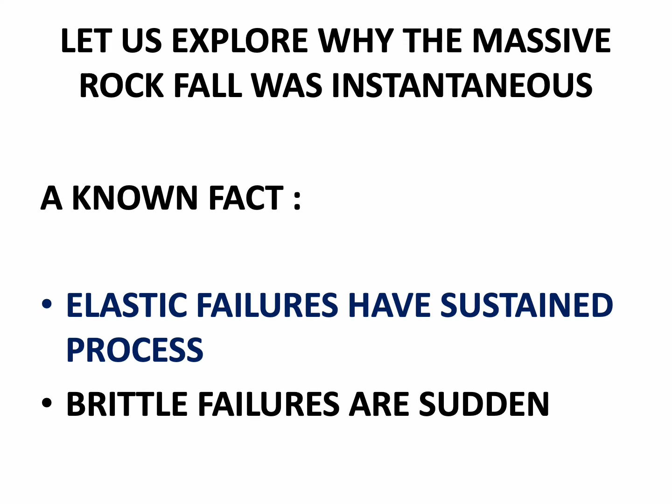Let us explore why the massive rockfall was instantaneous. A known fact is that elastic failures have a sustained process. Any elastic failure would have a sustained process, and a brittle failure will be sudden. These are the known facts. Lack of confinement pressure led to increased yielding and loss of ductile behavior, resulting in a vicious circle of raveling failure. Let's see.

This reference, Stress, Instability and Design of Underground Excavation, which we had earlier referred to in the paper, mentions that the higher the confining pressure, the greater the ductility observed. Increasing strain rate makes rock appear brittle. Now, the absence of confining pressure in the tens of meters in the crown resulted in the fallout of rock blocks in succession, one after the other. With increased cavity size, the effective zone of principal tensile stresses of rock mass increased.

With the progressive raveling, the resulting increase in strain rate made the rock mass more brittle. So this vicious circle had fallen in. There was absence of confining pressure in a reach of about tens of meters in the crown, resulting in the fallout of rock blocks in succession. This increases the strain rate and makes the rock appear more brittle. The progressive raveling falls in, and with the increase in cavity size in the cavity zone, the zone of effective increase of principal tensile stresses also increases with this process of raveling. Altogether, this vicious circle keeps on making the progressive cycle of raveling brittle failure of rock mass happen with increased suddenness and instantaneously.

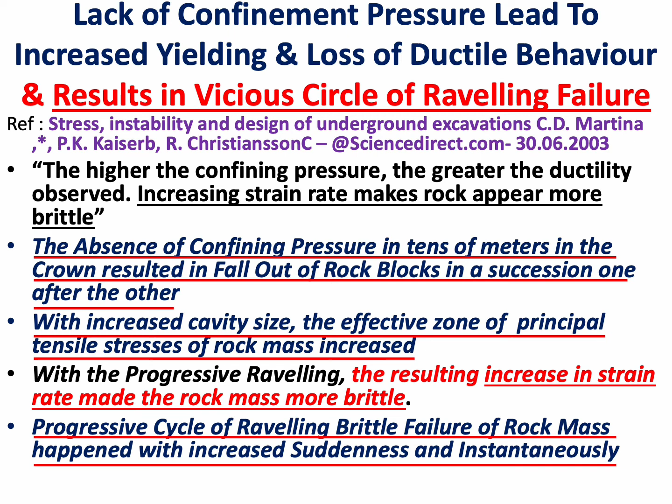NGI findings also ratified that crown fall followed failure of support in the footwall. The rock mass in the footwall of the shear zone first started to move down because of insufficient support and stress relaxation.

Distress in the wall supporting the crown, in the reach of the transverse shear zone in DSG from 135 meter to 195 meter, increased as excavation in the benching progressed. As benching progressed, this reach in the distress wall supporting the crown was seeing movement in the footwall.

The NGI findings ratify that the massive rock mass failure happened after 3 years of the crown standing stable, only when the increased deformations in the walls in DSG, which occurred due to increase in the benching depth to 40 meter in the reach of the transverse shear zone, resulted in settlement of rock mass in the walls, thus resulting in failure of the bearing support to the crown.

So NGI findings ratify this observation that after 3 years, when benching was progressing in the reach which is the transverse shear zone in the walls, and benching had progressed to around 40 meter in its depth, there were settlements of the rock mass in the walls happening, which resulted in failure of support in the bearing for the crown.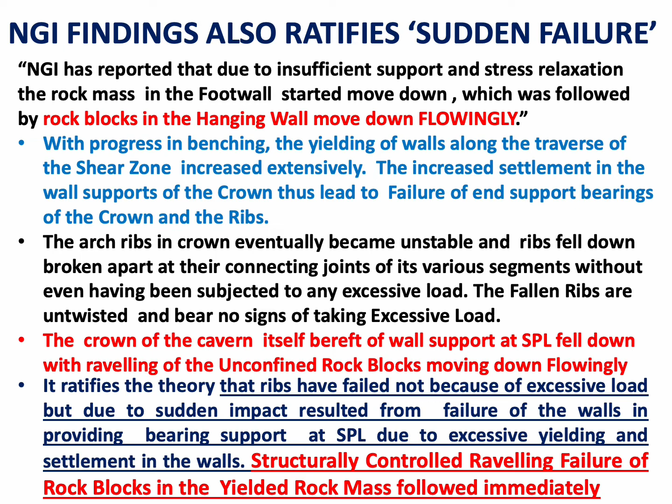Now these things are also observed in the instrumentation observations. Instrumentation observations explain why the massive rockfall in the downstream surge gallery happened after 3 years of the crown standing stable. As benching progressed, it reached below SPL and further below to 584 meter, there was an increase.

With the progressing benching, surface movements were noticed at the SPL instruments, with values increasing 22, 34, 12 kind of. Distress in the wall seen in the extensometers was also increasing with the increase in depth of the benching.

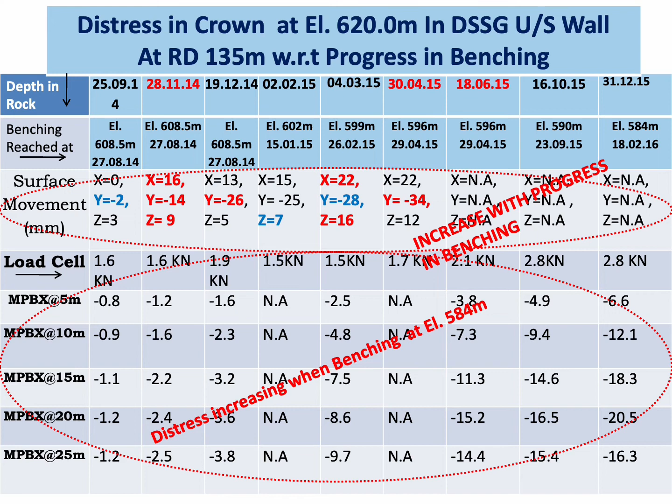So as benching was progressing, the movement and settlement in the walls in the reach where the traverse of the shear zone had cut the walls was increasing. The distress in the extensometers was also seen to be increasing.

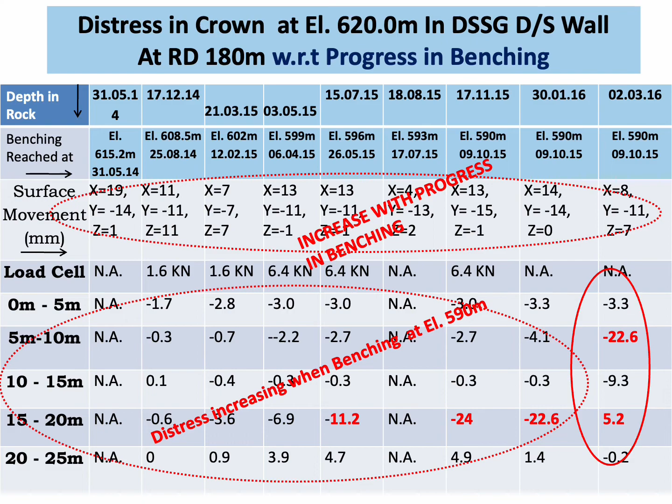Arch action was intact in the crown in the downstream until 2nd of March 2016. Excavation of benching in the shear zone reach from elevation 615 to 608 near RD 135 had been carried out from June to November 2014.

Sudden sinking and bodily drifting of the crown at RDs along the traverse intercepted by the shear zone at the haunch portion in the walls was noticed to have occurred in November 2014. A trend of increase in load, though not very significant, in the load cells installed in the crown happened in May 2015 after benching in the walls had progressed up to elevation 596.

The distress in the rock above the crown had not developed any significant distress till the sudden fall of the crown on March 3, 2016. Crown arch was intact as a rock mass of at least 25 meter thickness, that is MPBX of 25 meter length, did not show significant distress.

So this means that in a reach equal to the length of the MPBX, which was not showing much distress until 3rd March in the crown, it indicated that the crown was intact as an arch with its rock mass until March 2nd.

The load cell installed in the crown had developed excessive load suddenly on 2nd March.

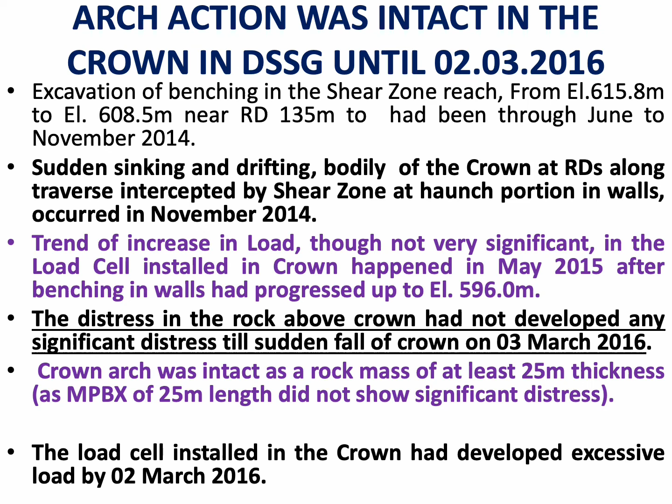The arch action till 2nd March was okay because this was having bodily drifting. Now when suddenly, with this movement in the footwall, the bearing given by the wall to the crown failed, then this arch action also failed to exist.

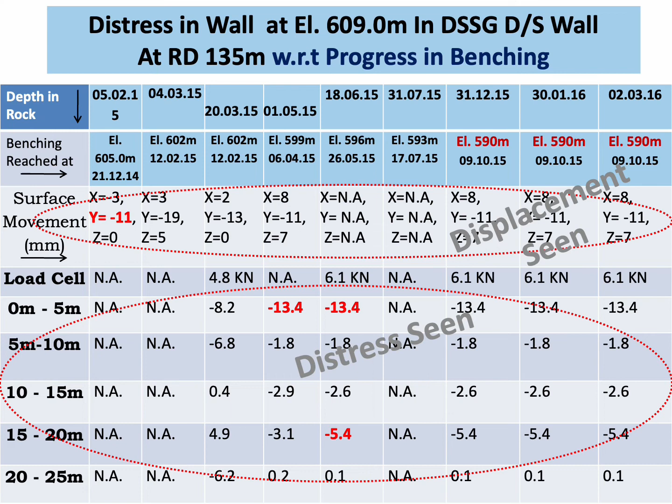This shows distress in the walls at 609 meter level. Displacements were seen at this level when the benching was progressing. So all along we see the displacements were increasing in the walls at the 609 meter level instrument, with increase in the depth of excavation.

But there was no provision of wall beam and cable anchors provided to strengthen the walls of the DSG, downstream surge gallery, which were designed only 40 meter thickness, despite that these pillars were intersected critically by a mega shear zone. Now, the intermediate pillar between the transformer hall and the downstream surge gallery was not provided with any cable anchors to strengthen the wall, and the rock pillar itself was 40 meter thick only.

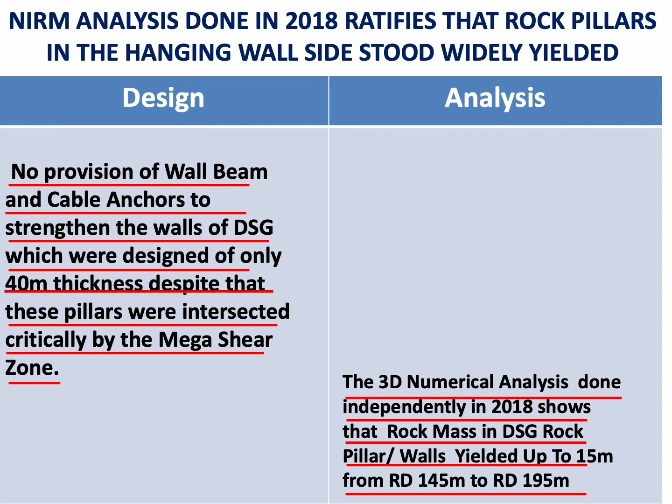The 3D numerical analysis done by NIRM in 2018 shows that up to a depth of 15 meters into this rock pillar had yielded along the traverse of this shear zone, between RD 145 meter to RD 195 meter. So in this reach, this 15 meter thickness of walls in the pillar between the transformer hall and the downstream surge gallery stood yielded along the traverse of this shear zone.

This is the shear zone, and as it was traversing through the depth of the downstream surge gallery, the rock mass in this region of 15 meter depth exhibited yielding. The 3D numerical analysis corroborates that the pillars of the downstream surge gallery were inherently weak due to presence of the shear zone and existing geology, even at the stage thus far excavated in the downstream surge cavern.

So with 30 to 40 meters of depth excavated, as compared to the total depth of 58 meters required for the downstream surge gallery, still the yielding was rampant in the walls in the reach where this shear zone was cutting the walls. This is seen at RD 146, 156. So across the entire reach traversed by the shear zone, the strength ratio was 0 to a depth of around 15 to 10 meters inside the pillar.

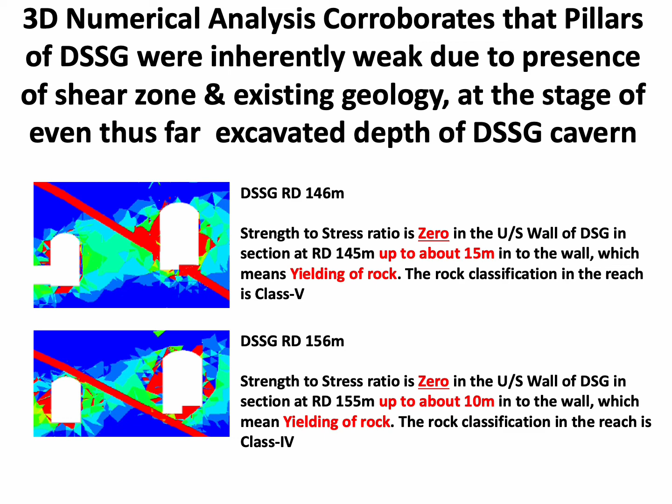The conclusion thus becomes: the cavity of 91 meter by 70 meter by 45 meter formed in quick succession. Increase of distress and yielding happened gradually over 3 years, with progress and increase in depth of benching in both walls of the downstream surge gallery, in the reach traversed by the shear zone and fractured mass. Lack of confinement resulted from presence of the steeply inclined massive shear zone in blocks of rock mass in the crown, having discontinuities with open and clay-filled joints in the downstream surge gallery on the hanging wall side.

Widespread yielding and increased settlement and displacement in the footwall at SPL finally resulted in failure of the wall support to the crown in bearing. As a result, the zone of relaxation and loss of confinement increased rapidly in the crown. Increased rate of loss of confinement pressure resulted in lowering the ductility of the rock mass in the crown.

Raveling occurred through a zone where confining stresses were less than 0 and maximum principal stresses were far greater than the UCS of the rock mass. The crown imploded suddenly along structural discontinuities due to brittleness resulting from increase in rate of yielding associated with the lack of confining pressure on the blocks of the rock mass.

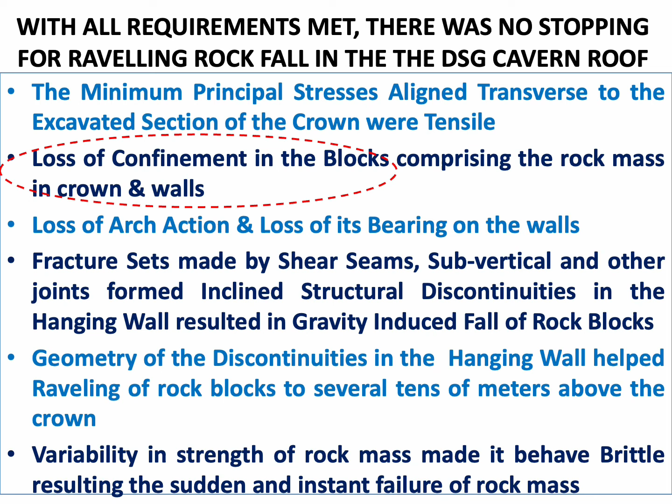Fracture sets made by the shear seams, subvertical and other joint forms, inclined structural discontinuities in the hanging wall, resulted in gravity-induced fall of rock blocks. Geometry of the discontinuities in the hanging wall helped raveling of the rock blocks to several tens of meters above the crown. Variability in strength of rock mass made it behave brittle, resulting in the sudden and instant failure of rock mass.

Now there are some few points of caution to the designers, that they should beware of adverse geometry of any hanging wall present, adversely poised fracture sets made by subvertical and other joint sets of the rock mass. They should be aware of variability in the strength of rock mass, loss of confinement making rock blocks loosely held and rock mass brittle, resulting in sudden raveling of loosely held rock blocks, resulting in the rock blocks falling under gravity one after the other. So these things they should anticipate and be aware of in their further works.

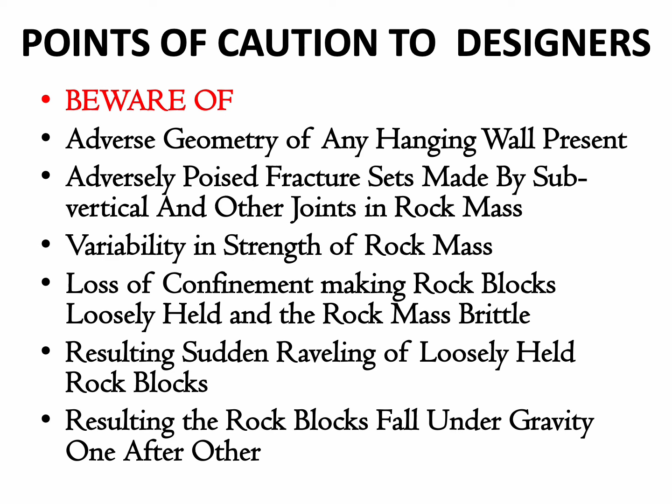Points of caution in design continue. In a reference book, Underground Excavation in Rock by Hoek and Brown, it mentions at page 10: in rock masses with strongly developed inclined structural features, excavation stability may be dominated by gravity falls and sliding along inclined discontinuities. So this is important, that in rock masses with strongly developed inclined structural features, excavation stability may be dominated by gravity falls and sliding along inclined discontinuities.

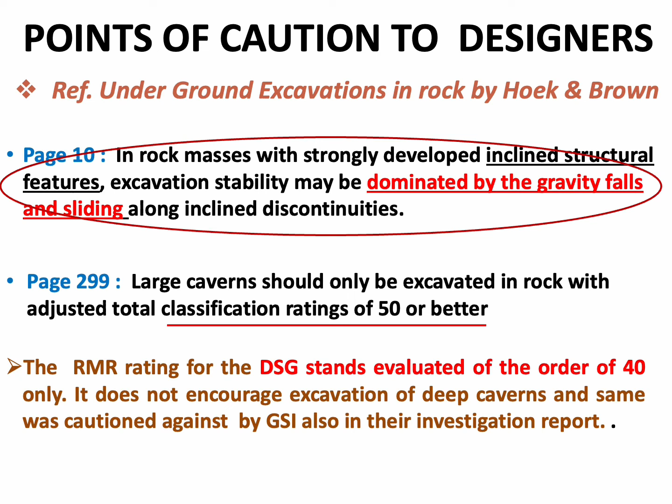Large caverns should only be excavated in rock with adjusted total classification rating of 50 or better. This is also mentioned at page 299. A total classification rating of 50 or better should only be attempted for large caverns. The RMR rating of DSG stands evaluated at the order of 40 only. It does not encourage excavation of deep caverns, and the same was cautioned against by GSI also in their investigation report.

Hoek and Brown give a flow chart which says that in hard rock masses with strongly developed inclined structural features, excavation stability may be dominated by gravity falls and sliding along the discontinuities. Rock classification system is inadequate in such cases.

Then it says that in such cases, check for instability due to adverse geology. A check should be made for stability or instability due to adverse geology. Then it should be checked whether stability can be improved by relocation and/or reorientation of the excavation. So this is a major check, that under such circumstances where the rock classification system becomes inadequate because of dominated gravity falls and sliding along inclined discontinuities, it should be evaluated earlier whether stability can be improved by relocation or reorientation of excavations.

Can adequate support be provided to ensure long-term stability? It further says that if this cannot be done, if the reorientation or relocation was not possible, then can, under these circumstances, adequate support be provided to ensure long-term stability? This should be checked next.

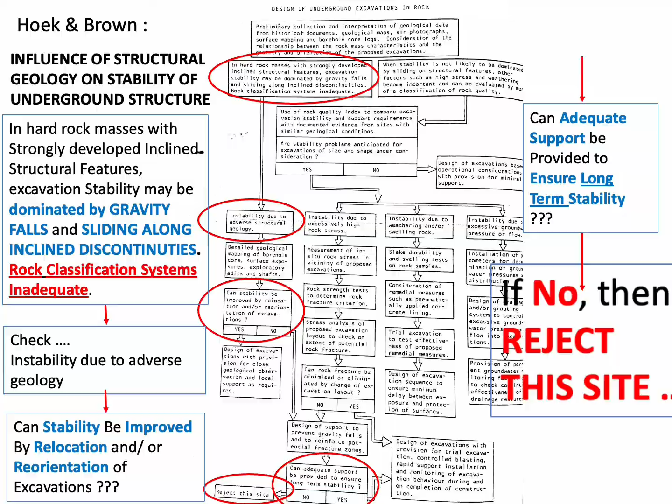Now, what would have been an approach to correct design in this case was to provide wall beams and cable anchors. That was not provided in this case. Had these wall beams and cable anchors been provided, there were fairly good chances that the failure would not have happened. But if these were also seen by designers as not adequate at that stage, then they should have rejected the site, as is advocated by Hoek and Brown.

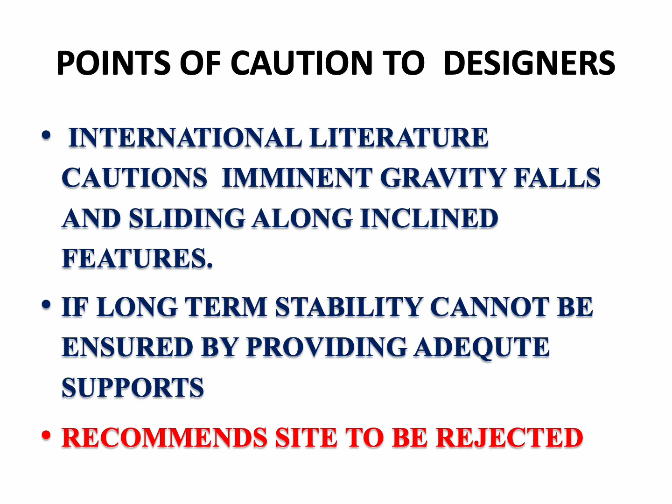International literature cautions against imminent gravity falls and sliding along inclined features affecting long-term stability. If long-term stability cannot be ensured by providing adequate supports, the recommendation says the site should be rejected.